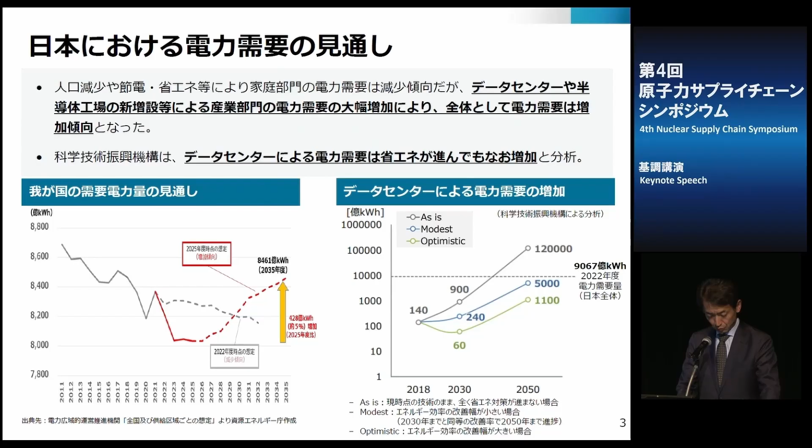This looks at the electricity demand outlook, and it's probably common across the world: data centers and semiconductors will drive the increase in demand for electricity. Against that backdrop, there is a rising need for stable and decarbonized electricity, which will have a great impact on Japanese industrial competitiveness.

That is the backdrop against which we came up with the 7th Strategic Energy Plan. Various countries are moving to leverage nuclear energy. Particularly last year, there were a number of developments in Sweden, Belgium, or Switzerland. Those countries have decided to proactively increase nuclear energy, and some of them have really changed their policies.

Canada has approved the construction of the first SMR. In Asia, countries such as Indonesia, Philippines, and Malaysia are looking more seriously at the possibility of using nuclear energy as an option. International financial institutions are also making the move: World Bank, ADB, Asian Development Bank are lifting their previous bans on funding nuclear energy programs.

IEA has published its World Energy Outlook 2025, which provides the future outlook of the energy system. They talk about the shift in the center of gravity, renewable energy becoming more important, etc., and it also talks about the nuclear energy comeback.

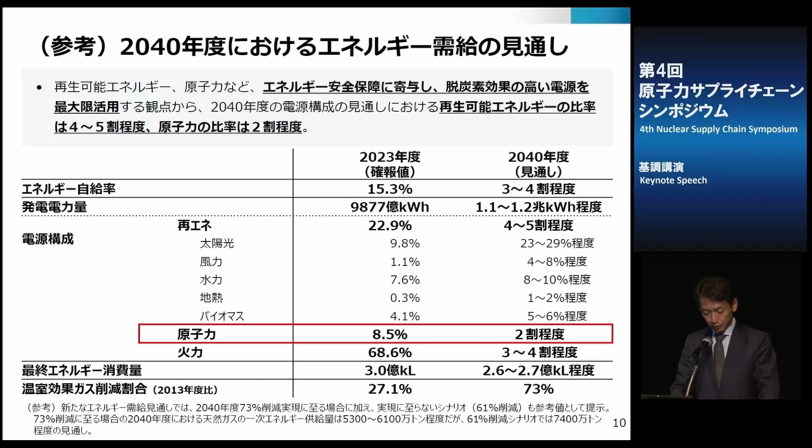This shows the energy supply demand outlook. In FY 2023, 8.5% of the energy demand was met by nuclear. Looking ahead, obviously it depends on how others will grow, but we expect nuclear to be responsible for about 20%.

Now this looks at how the current nuclear power stations are doing. Kashiwazaki Kariwa has successfully restarted. So there are 15 units that have successfully restarted, but some still have installation license changes approved, while some are still under review, and many have yet to even file for that.

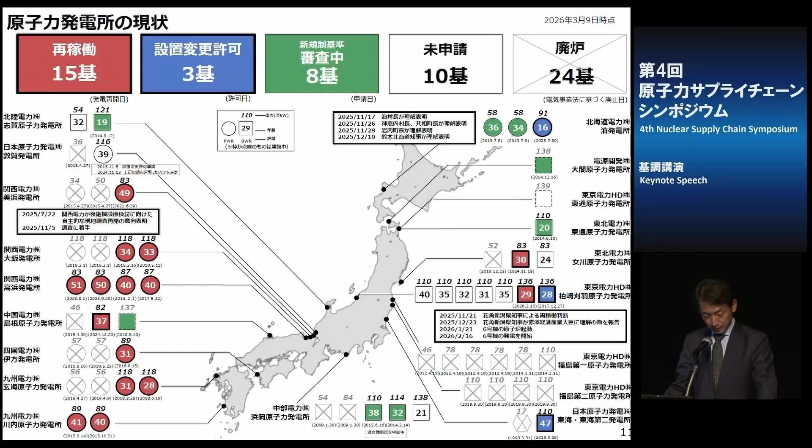But if you look at the outlook of nuclear power and supply capacity, to realize 20% in 2040, we will need to work on capacity utilization improvement and addition of next generation innovation. So it's not just restarts that we can work on. There are other things we need to do.

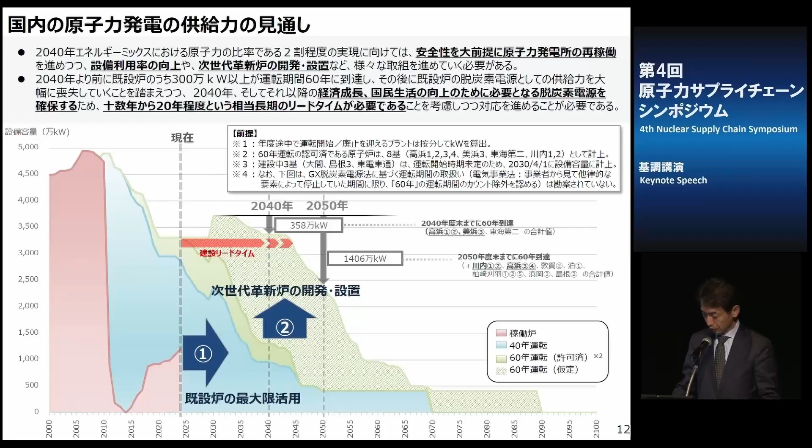Given that there's a long lead time, over 10 years or 20 years, to build those new nuclear power stations or units, this is really something we need to act on now. So we'll need to look at restarts, long-term operation, and enhanced capacity factors. Those would be the focus.

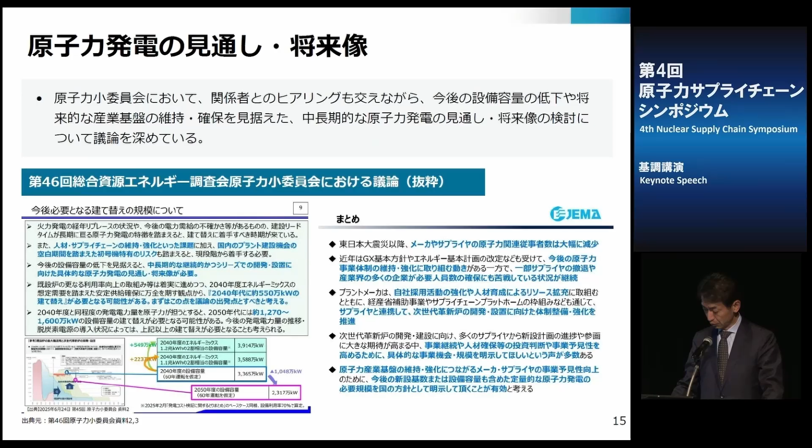With regards to the future for nuclear energy, we have a subcommittee of the Advisory Committee for Natural Resources and Energy for the agency, and we are discussing all this. Obviously industry members and members from academia and local governments are also focused and engaged in this. This will be a very important discussion on installed capacity, etc. There are some uncertainties, but we are looking at what the right picture should be in the future that we will seek to realize.

One of the things that government should do is make sure there's the right business environment, particularly with regard to financing. There are risks that private sector financial institutions cannot necessarily shoulder, so public measures such as government credit enhancement are being considered. And if legislation is necessary, we will work on that as well.

With regard to supply chain enhancement, I may sound repetitive, but if you think about the long term, you need to make sure there's the right supply chain and human resources pool. In March 2023, we established the NSCP, Nuclear Supply Chain Platform, to look at nuclear human resources development and parts obsolescence, addressing that issue, and also trying to support Japanese suppliers being part of international projects. There are a large number of companies and entities that joined. I'm sure many of you here are members of this platform.

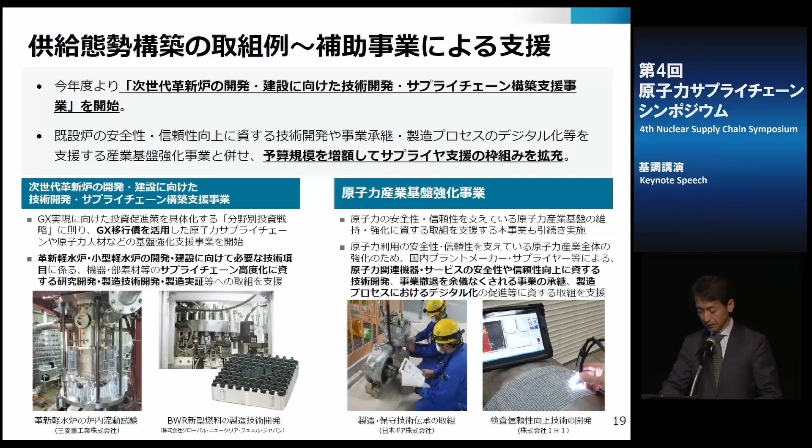I'd like to thank you for your efforts, and METI is also committed to supporting these efforts. Specifically, for suppliers, we would like to support your technology development, and we are also looking at your infrastructure. So we are actually increasing the budget, using the so-called GX bonds, or climate transition bonds, to fund those activities.

We are also focusing on commercial grade dedication and 3D printers, as well as utilization of AI, so as to leverage all those new technologies, and we want that to be an industry-wide initiative. We are supporting that as the government, supporting each and every entity with some projects, but also trying to support a wider, broader, common initiative.

When you think about the supply chain, human resources is a very important part. If you look at the whole of Japan, and the manufacturing industry as a whole in Japan, we are facing a serious shortage. Against that backdrop, how do you make sure there are enough people to be in the field and in the plants? So we are working on engaging students as well as mid-career people.

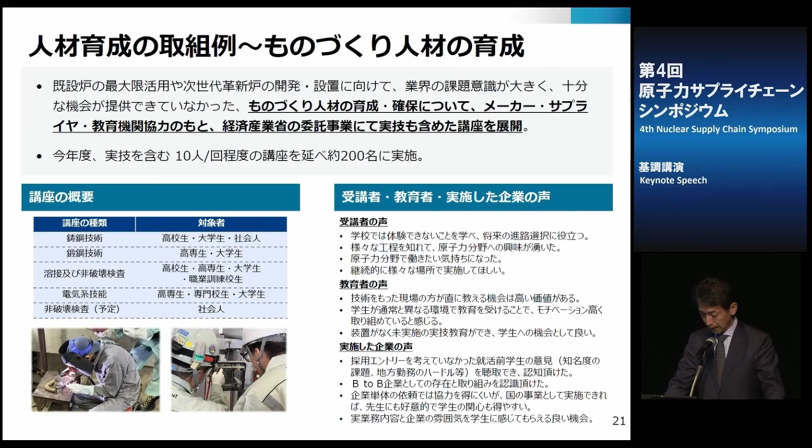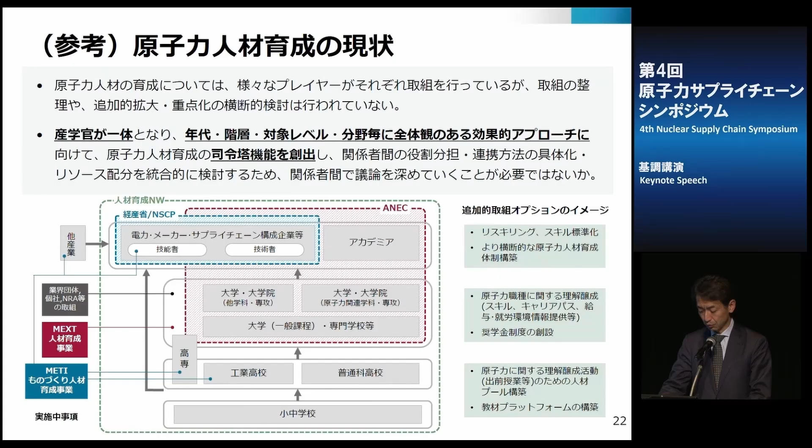We are getting the support of some supplier companies to offer courses to potential new nuclear workers. It's not just METI; we are also working with MEXT, NRA, and all those related agencies. We're also working with JAIF, an industry organization. But sometimes there could be overlaps, or spots in between that we are missing out on, so we are trying to coordinate across those different efforts. Given that we need to really make sure there's the right human resources pool in Japan, we would like to do this effort more effectively and efficiently, and therefore coordination is all the more important.

Given that understanding, METI actually took the lead to organize this new consortium, the Council for Nuclear Human Resource Development and Enhancement. This is intended to become a footprint to establish a command center to coordinate various activities at various agencies and organizations, and given that there's a wave of nuclear building in the global industry, we are trying to make sure that the Japanese industry can leverage that opportunity.

So the Japanese suppliers, so that they can be part of the construction abroad, we are actually helping. For example, we sent a mission or a group of suppliers to appeal the track record and the strength that the Japanese suppliers have. We are also organizing study sessions for the international and overseas standards and codes that those suppliers need to address, so that Japanese suppliers can contribute to energy security outside of Japan as well, and also get the right opportunities so that they can maintain their technology base and human resources base.

Given the global situation that we are in, we will really need to think about the maximal use of nuclear energy in Japan. For that to be sustainable, we will need to make sure that the supply chain is there, and we would really need the industry support and cooperation to make this happen. In addition, for the next generation innovative reactors, we will need to make sure that there is the right parts and components material supply system, and actually enhance that in conjunction with human resources. So we would continue to work on these so as to proceed with the policies of the government as a ministry, and we hope we can continue to have the support of the Japanese industry.

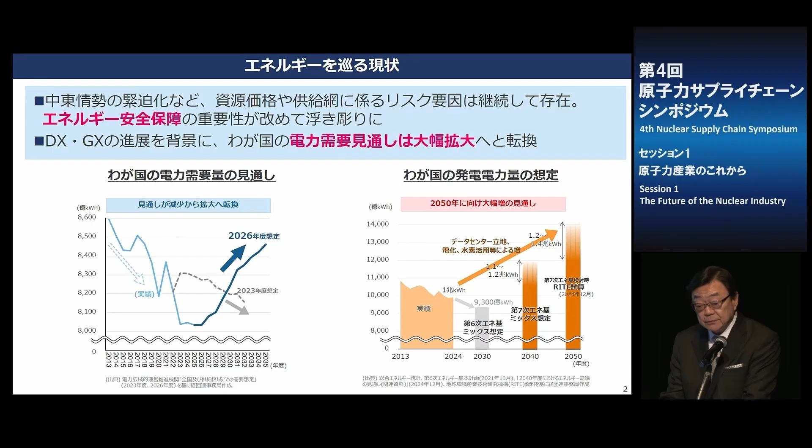In Japan, drive for electrification through green transformation and the advancement of digital transformation fueled by generative artificial intelligence have radically shifted the electricity demand outlook from a declining trend to a significant expansion. Achieving carbon neutrality by 2050 while adhering to the S+3E principle, that is, achieving both decarbonization and an affordable and stable electricity supply, has become an increasingly important policy issue for Japan in maintaining and strengthening industrial competitiveness and achieving sustainable growth.

One key to resolving this is the use of nuclear. Keidanren has long urged the government to actively utilize nuclear as a quasi-domestic, stable, and decarbonized power source. As I mentioned earlier, the 7th Basic Energy Plan approved by the Cabinet in February of last year clearly commits to making maximum use of nuclear, and the business community highly appreciates it.

Furthermore, we are extremely encouraged by the proactive stance of the new Takaichi administration to promote nuclear policy, including consideration of cutting-edge technologies such as fusion energy. We urge the government to continue to implement concrete measures to effectively utilize nuclear power. In doing so, it is important that the quantitative outlook and vision be provided so that operators can have predictability when making medium to long-term investment decisions.

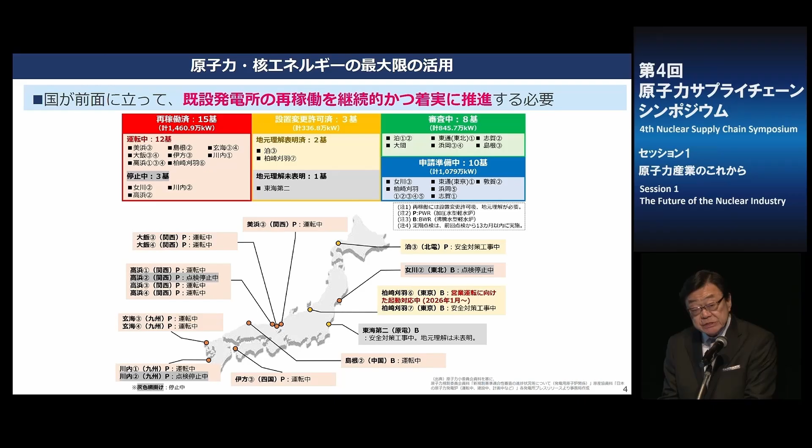To facilitate the restart of existing plants, Keidanren has been making policy recommendations and taking various other measures, including fostering understanding among stakeholders and checking the status on site.

For example, on December 1st of last year, our chairman and vice chairman visited Kashiwazaki Kariwa plant, which supplies power from the coast of the Sea of Japan to the Tokyo metropolitan area and plays a significant role. He observed safety measures of Unit 6, both hardware and administrative aspects, such as emergency response programs.

And they confirmed that the entire plant, including the partner companies, is working to secure safety in multiple layers. After the visit, the chairman and the leadership met with the Niigata governor, Governor Hanazumi, in his office, and conveyed the chairman's respect for the governor's decision on the restart and his gratitude to the people of Niigata, and told him that Keidanren will consider measures to contribute to the development of Niigata Prefecture.

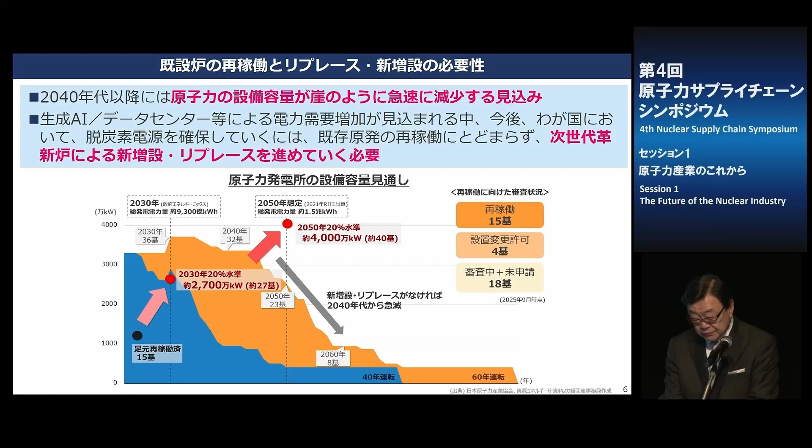Given the expected increase in electricity demand due to artificial intelligence and data centers, securing a carbon-free power source requires not only the restart of existing plants, but also the replacement and new builds of next-generation advanced reactors.

For replacement and new builds, it's important that the public and private sectors share a roadmap on next-generation advanced reactors so as to promote the use of advanced LWRs, and also advance the development of fast reactors and high-temperature gas-cooled reactors in parallel.

Fast reactors are essential for Japan's nuclear fuel cycle. We hope to see efforts being accelerated to establish this technology.

HTGR, high-temperature gas reactors, offers a wide range of applications, including heat supply and hydrogen production. Business community has a great expectation in this technology as a promising source of hydrogen, such as in hydrogen reduction steel making.

These new reactor types have characteristics and safety features different from conventional LWRs. It's important that they be reflected in designing regulations.

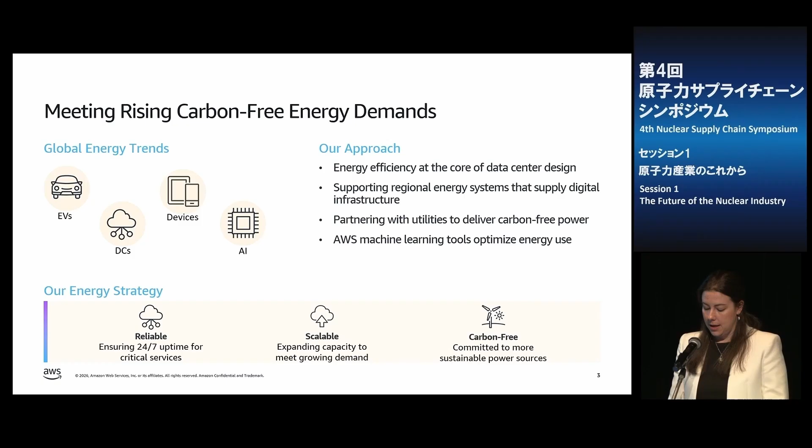Renewables and nuclear are not competing priorities. They are complementary pillars of a credible decarbonization strategy. Nuclear energy generates nearly 20% of US electricity and nearly 55% of the United States emission-free power. It's carbon-free, scalable, safe, and critically provides reliable baseload power 24 hours a day, 7 days a week, regardless of weather. For Amazon, nuclear therefore represents a response to a fundamental challenge.

As our digital infrastructure continues to grow to support AI and cloud services, we need energy that is always on. Renewables are essential, but they are weather dependent. Nuclear fills that gap. That is why Amazon has entered into nuclear energy agreements, including with both existing nuclear facilities,

such as Susquehanna in Pennsylvania, and next-generation small modular reactor developers. We are supporting SMR innovation through strategic agreements and capital investments, partnering with utilities and operators to procure carbon-free energy, and diversifying our carbon-free energy portfolio with nuclear as one component of a broader strategy.

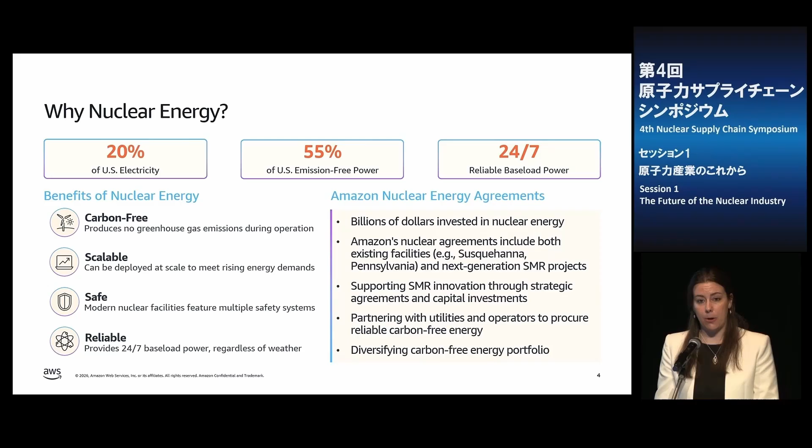Nuclear's energy potential is clear, but scaling it requires a resilient supply chain, and that supply chain needs long-term demand signals to develop. As you all know, nuclear is not a single product, it is a system. Deployment requires synchronized execution across engineering, manufacturing, construction, fuel supply, operations, and quality assurance. Any delay in a single component creates critical path failures across the entire project.

3 constraints define the challenge globally. First, nuclear is a system; every domain must execute in coordination. Second, workforce and quality: skilled labor, nuclear-grade quality control and quality assurance, and rigorous documentation are global constraints today. Personnel deficits drive cost inflation and schedule risks.

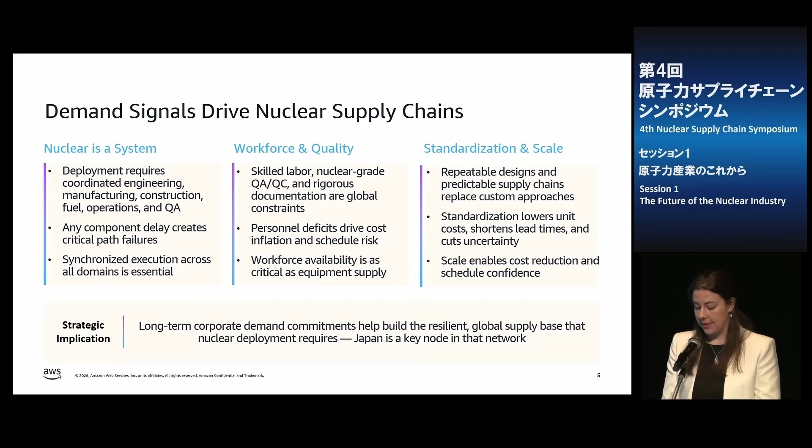Third is standardization and scale. Repeatable designs and predictable supply chains replace custom approaches. That's because standardization lowers unit costs, shortens lead time, and reduces uncertainty. The strategic implication is this: long-term corporate demand commitments help build the resilient global supply base that nuclear deployment requires, and Japan is a key node in that network.

That brings us to Japan and why Japan matters. 3 principles define what enables resilient nuclear supply chains. The first is demand visibility enables investment: long-term demand signals unlock supplier capacity. Bankable offtake commitments enable manufacturers to build out production lines with confidence.

Second, early engagement improves outcomes. Design for manufacturer, qualification planning, and realistic lead times ultimately reduce execution risk, and supplier collaboration prevents late-stage bottlenecks. Third, and most relevant for this audience, Japan's strengths scale globally. Japan's precision manufacturing, quality culture, and heavy industry capabilities are not just assets for Japan's domestic nuclear restart program, they are critical enablers of global nuclear deployment.

Our own experience illustrates this directly. In November 2025, X-Energy, our SMR development partner, signed a $40 million graphite supply agreement with Toyo Tanso for high-grade IG-110 isotropic graphite for the Xe-100 reactor cores. This graphite acts as a critical neutron moderator and structural component. This partnership is a signal of what is possible when Japan's world-class manufacturing meets the global nuclear build-out.

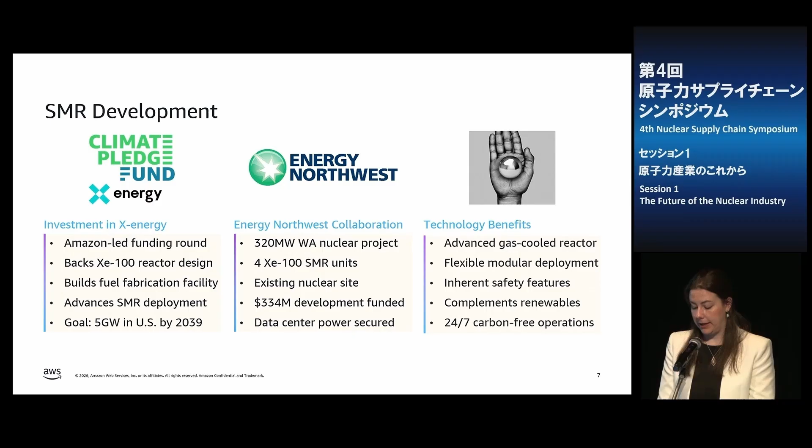The XE100 complements our renewable energy portfolio: advanced gas-cooled design, flexible modular deployment, inherent safety features, and 24/7 carbon-free operations. Drawing on our experience across these operations and agreements, 4 lessons stand out for anyone looking to scale renewable energy, nuclear energy. The first is flexibility and creativity.

First of its kind nuclear developments require commercial solutions that do not yet exist. Investing in and adapting those solutions is how the industry will move forward.

The second lesson learned is the need for collaborative models. Tailored partnerships with experienced nuclear operators are critical. Amazon does not own or operate nuclear facilities. We partner with those who do. One-size-fits-all approaches are not going to work in nuclear.

The third is grid integration. Our goal is to support regional energy systems that supply digital infrastructure and broader grid demand, not to optimize for a single customer's needs, but to add new carbon-free capacity to the grids that all of our communities depend on.

And the fourth is the need for long-term agreements. Reducing nuclear development risk requires long-term contracts and strategic financing. Certainty of demand is what unlocks investment in supply chains, in workforce, and manufacturing capacity.

These are not just lessons from US projects, they are a framework for how corporate energy demand can support Japan's nuclear goals, providing the long-term demand signals that justify supply chain investment, workforce development, and capacity expansion.

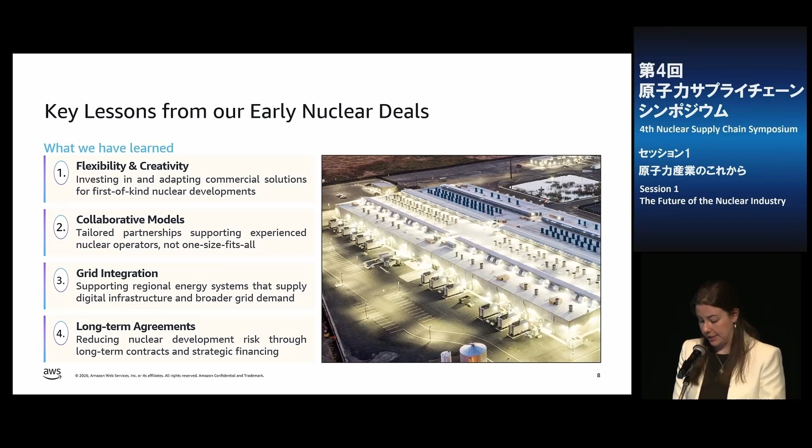Thank you very much. Amazon is genuinely committed to Japan's energy transition, and we look forward to continued dialogue with METI, the Japan Nuclear Industry Association, and the broader supply chain community represented in this room today. Thank you very much.

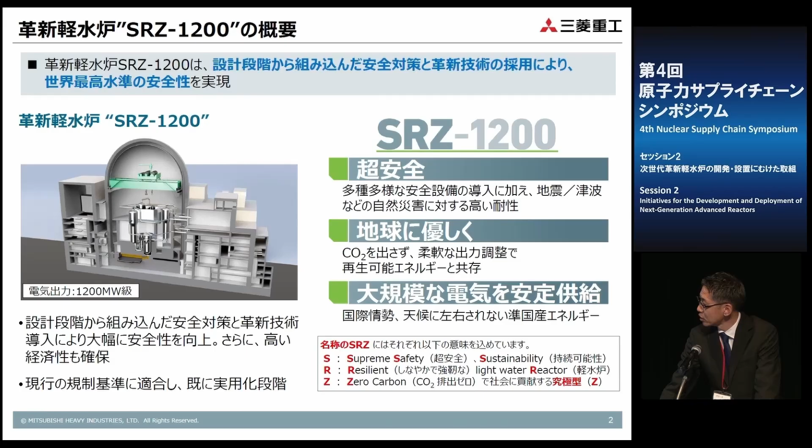So where are we with regard to the development? For the SRZ 1200, we are working in tandem with 4 utilities that own and operate PWRs. We are working on the standard plant development, and the basic design for that is almost finished. We are also conducting various demonstration tests that will be fed into the licensing process, and things are going as planned so far.

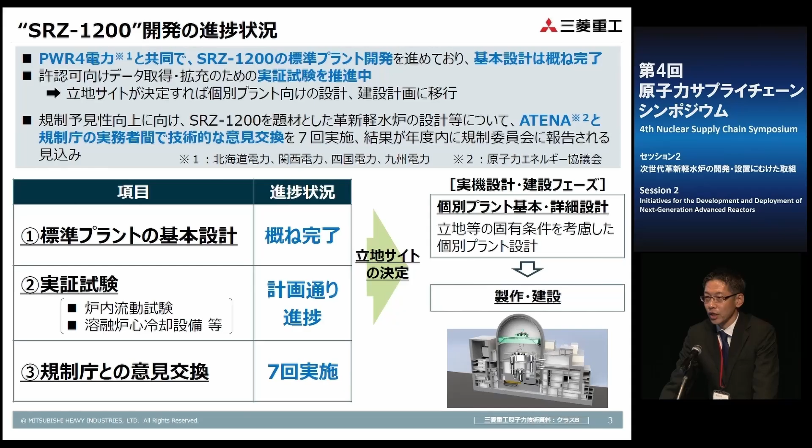We would like to improve the regulatory foreseeability, so we are working with the NRA at the working level. We've already held 7 such sessions, and the results will be reported at the Nuclear Regulation Agency's commissioners meeting by the end of this financial year. So we are now ready to actually move into the detailed design for each and every siting.

This is about the standard plant and the basic design. We have established the basic common specifications. We've designed the major components, the systems, and the layout. Those are all almost complete.

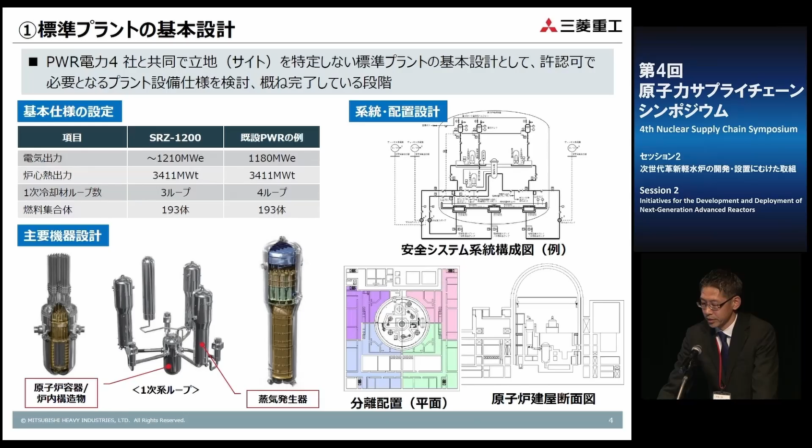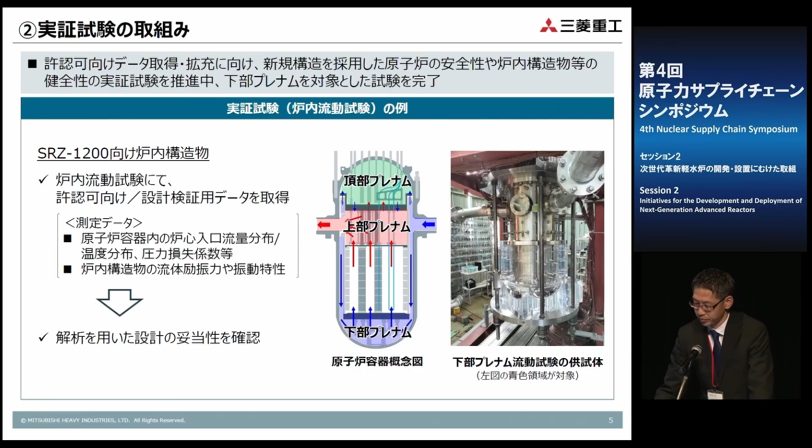With regard to communication with the regulator that I referred to earlier, these are obviously using a different design from the existing light water reactors, so some parts may not have enough regulatory foreseeability. We have identified 3 potential issues, and we, as the licensees, have been presenting them to seek the view of the regulators. We've been doing this for about a year, and by the end of this financial year, those results will be reported to the commissioners' meeting, as I mentioned earlier.

Now, this is about our small light water reactor that we are also developing. Given that there will be various and different needs for power generation, we are proceeding with the conceptual design using Japanese technology for a small light water reactor.

Given that it is a small reactor, we are using passive safety systems, and we are trying to make it so that the seawater system is no longer necessary as a safety system, allowing for more freedom of siting. We will obviously address the seismic requirements and severe accident requirements that are required in Japan.

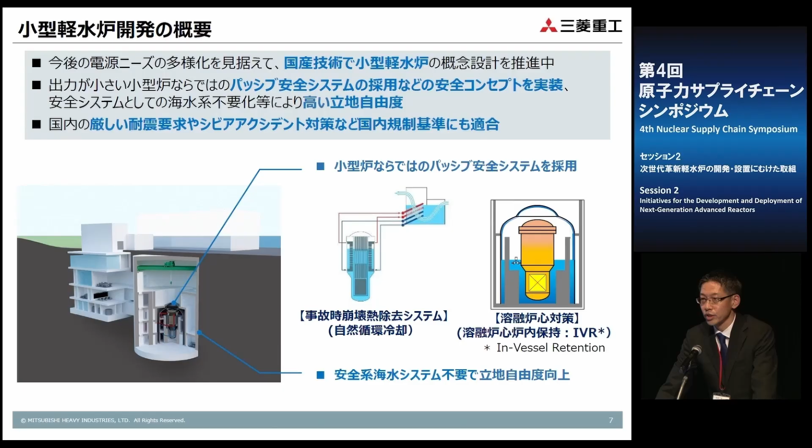Now, this is about building up the company's capacity to realize all that. Given that the government intends to maximally use nuclear energy, we are also building up our organization and resources. In FY2025, including the group and affiliated companies, we have hired 200 new people for nuclear related operations, and we will continue this in the next financial year as well.

With regard to the training system we have in the company for construction, design, and maintenance, we have fundamental courses, about 50 of them, covering all those different fields. For field skills, we are using simulators and virtual reality. We have various materials and modules ready. We also have programs for skills training, so we continue trying to offer opportunities for learning and training for our human resources pool.

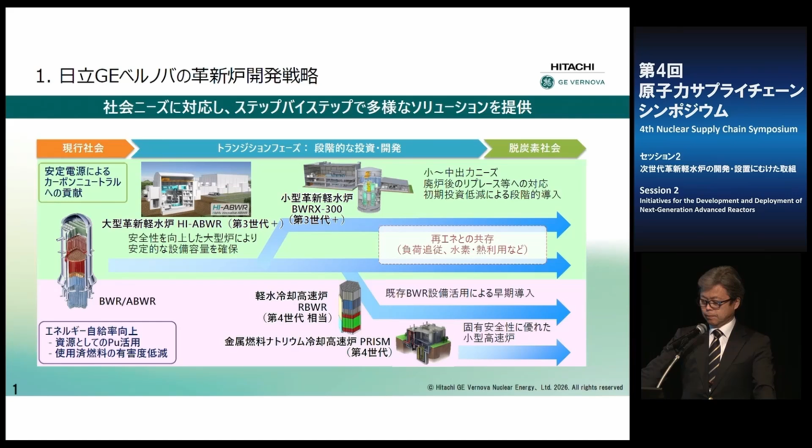In terms of working together with renewable energy, we are using the technology for load following and hydrogen production, as well as heat production. This is the larger one, HI-ABWR, which is based on ABWR.

Lessons learned from Fukushima are being incorporated from the design phase so as to satisfy all the regulatory requirements in UK and Europe, and there are various safety features. One is the walk-away safe concept.

As you can see on the right-hand side, at the time of an accident, without manual operation, the system could be run for 24 hours. And in terms of controlling radioactive material release, we use the noble gas membrane.

Cesium is removed through the filtered vents, but also by removing the noble gas, the radiation level could be reduced to 1/100th, which would alleviate the need for resident evacuation. We're also enhancing the resistance to terrorist attacks and hazards.

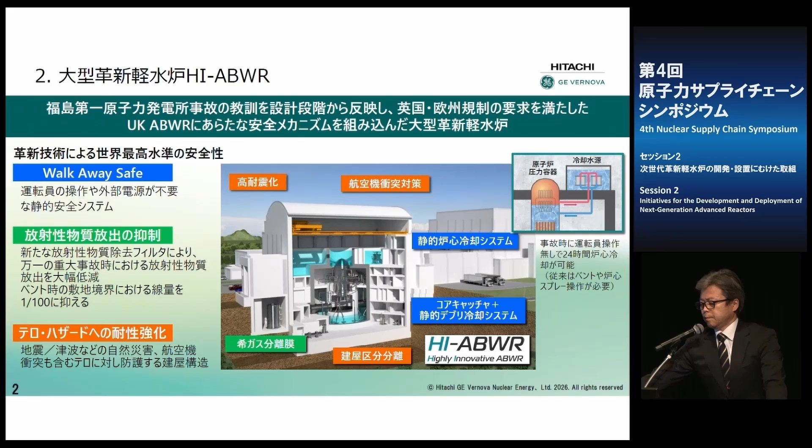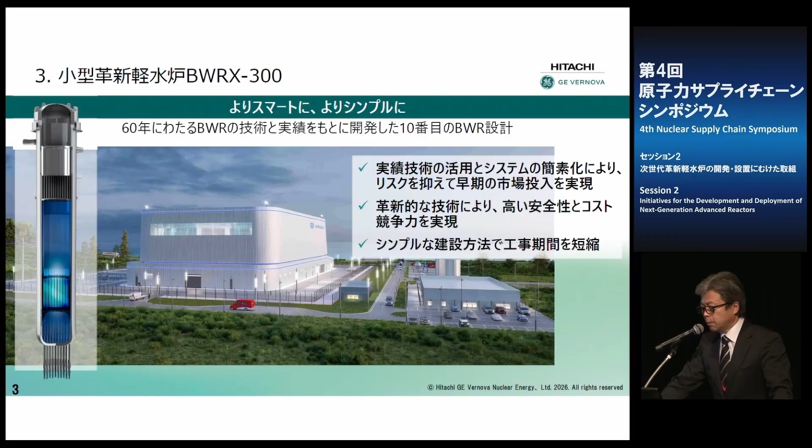From here, I'd like to talk about the small reactor, BWRX-300, for smarter, simpler solutions. Accumulating all of the expertise we have acquired over the last 60 years of BWR, the 300,000 class is the output. As for characteristics: the world's best safety is to be maintained, yet it excels in economy, constructability, and flexibility.

You can see the reactor building at the center, and what's shown in blue is the pressure vessel, which supports natural recirculation. This is almost buried, and therefore it can resist attacks from outside, including aircraft crashes.

And we have the integrated isolation valve, so by just shutting down the valves, we can maintain coolability. Natural circulation is used for cooling, and for 7 days cooling could be maintained without operator involvement.

By introducing these innovative technologies, we can reduce the amount of work necessary as well as materials. We have accumulated our expertise in modular building construction, and we are trying to apply this more broadly for assured and short-term construction.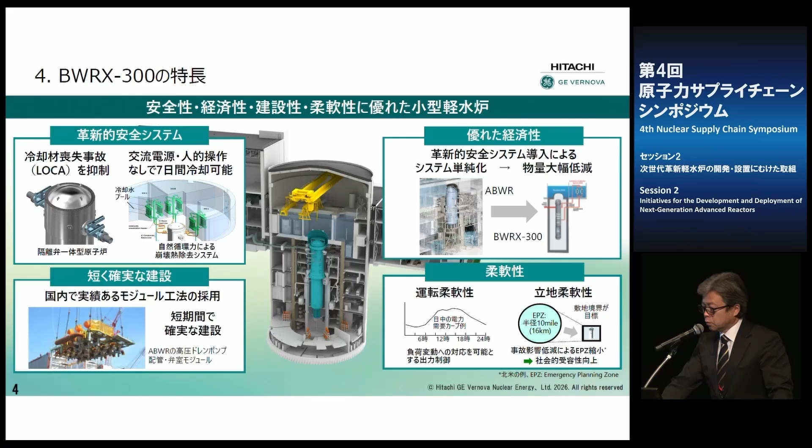In terms of flexibility, it will have a load-following feature and an EPZ, Emergency Planning Zone. The planned zone for evacuation would be limited to within the premises so as to minimize the impact to local residents, and we're trying to enhance acceptability by that.

As the first country in the West to decide on adoption, Canada raised its hand. This is in the state of Ontario at the Darlington site. 2030 is the scheduled date of the start of operation, and altogether we're thinking of building 4 units. This is the site as it looks today. I'm going to skip it in the interest of time.

So the projects proceeding globally: on the upper left is the Canada Darlington site, on the right-hand side. In Saskatchewan, 4 more are to be built. And in the U.S., TVA is to build the site at Clinch River. The application has been submitted to have the construction permit screening start. And in Poland, there are plans to build 10 units altogether.

And there is a project going in the UK as well, where GE Vernova Hitachi and owners are signing contracts to proceed. Hitachi GE Vernova is participating as the co-developer.

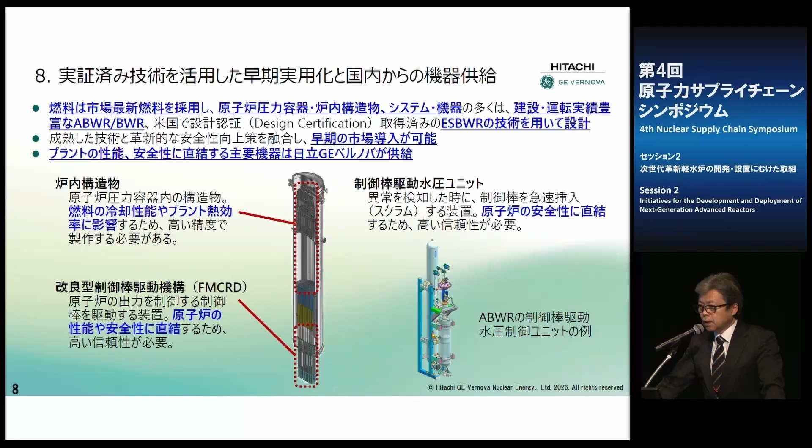And the key is that these components are to be supplied from Japan—that's the key characteristic of our approach. As for global deployment and main equipment supply, we are collaborating, planning to work with approximately 70 companies in the Japanese supply chain.

We want to create business opportunities together with these Japanese partners so as to improve profitability as well as enhance technology and human resources. By collaborating with them for supply, we can ensure the success of the initial unit as well as translate that into mass production of the ensuing units.

With regards to technology transfer and human resources development, we are seeing the number of veteran experienced workers declining. So we want to increase experienced workers by 50% by 2030 compared to today, and we are taking various approaches addressing different aspects. That concludes my presentation. Thank you for your attention.

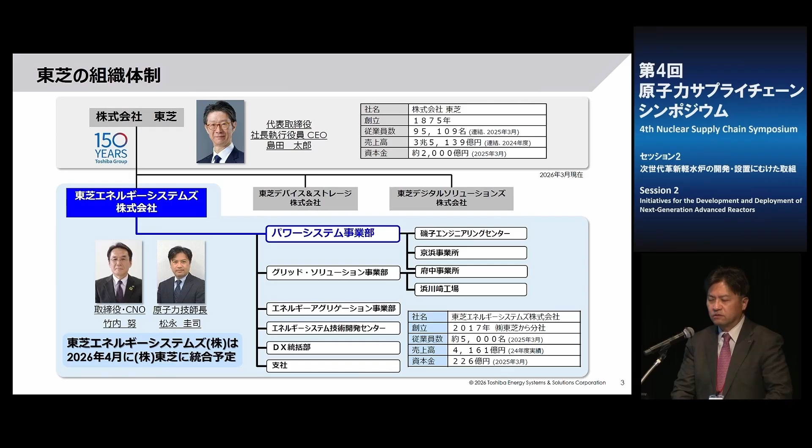Let me first go through our structure and organization. Underneath Toshiba, we have an operating business called Toshiba Energy Systems, which was spun off. But this coming April, Toshiba Energy Systems is going to be integrated back into Toshiba, so we will be working as one operating department under Toshiba beyond April. Also, our Power System Division had nuclear power, thermal power, and hydropower, but now we will be formed as a nuclear business department division from April onward, so we focus on nuclear within our division.

Next, let me talk about our efforts in nuclear power, starting from the front end on the left all the way through plant construction, restarting, decommissioning, or on the back end for processing and reprocessing. We cover a wide range of different nuclear business using different nuclear energies, and we are also trying to contribute to new technologies as well.

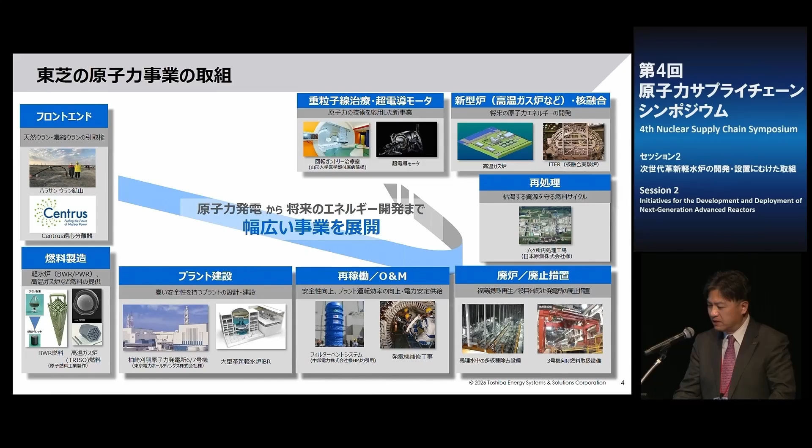Since the accident, there's been some changes in regulation in Japan and around the world. In Japan, new regulation is introduced to address severe accidents and terrorism. Around the world, they're talking about the period without operators being shortened, and also the target area for emergency planning being minimized as much as possible.

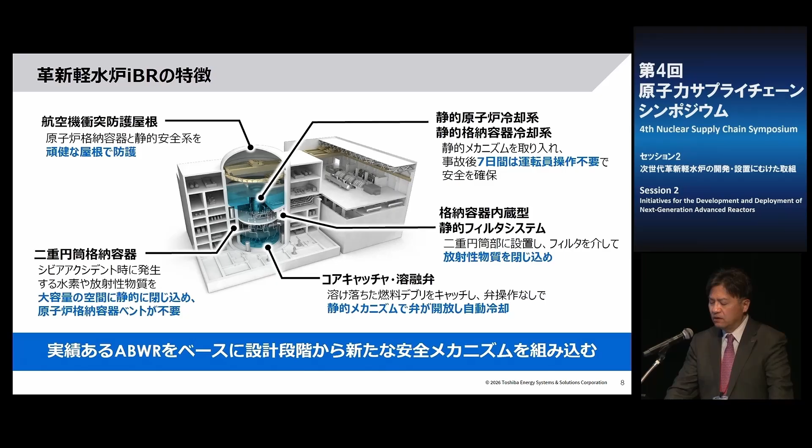This is the equipment to accomplish those points I mentioned earlier, and these are the main features. Left top, this is about the aircraft impact protection roof - even with an aircraft impact, we can protect the safety equipment. To the right, a static reactor cooling system, static containment cooling system - I will have more details on this in the next slide. Going down, core catcher and melt-through valve. Also to the left, double-walled cylindrical containment vessels, and we also have a static filter system for the containment vessel. Those equipment are utilized to accomplish the 3 safety-related elements I mentioned.

This is the safety system activation mechanism for IBR. So for some reason, core temperature increases because of cooling suspension. Then, as you see at the right top, the static reactor cooling system is what we use to remove the heat - the orange line shows hot steam being released to the upper pool to be cooled down, and using the blue line to put the water back into the reactor so that we can continue cooling down the reactor.

Then we should be able to contain any accidents to some level. But even if we face a meltdown in the core, at the right bottom and left bottom we have a core catcher, so we can receive the melted core, and once we receive it at the bottom, we can also circulate water from the bottom side, so we can continue cooling.

Then we continue cooling, and the water will actually evaporate along with the hot heat. To remove the heat, we use the left top, which is the static containment cooling system. That's what we have. Just like earlier, same mechanism: the orange line takes the hot steam to the top and cools it down there. Once it cools down, we put it back into the suppression pool at the bottom.

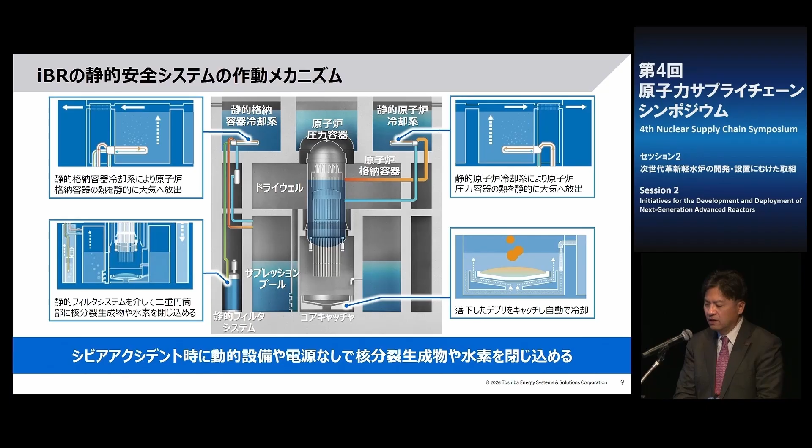At the same time, radioactive substances and some gases will be created. We use this green line to go down to the static filter system - it's a filter vent. We remove the radioactive substances, including hydrogen, and contain them into the double cylindrical containment system, making sure they will not be released outside. Next, talking about the robustness of the building.

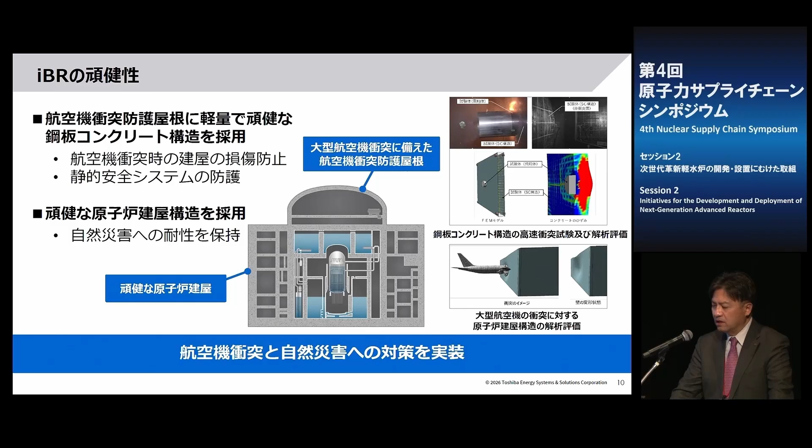Then, safety category - ABWR already applies this safety category, and we are reinforcing these categories furthermore. On ABWR we have 3 safety categories. In addition to these 3 categories, we are also adding the countermeasure for severe accident, the SA equipment, severe accident equipment. So we have a very tight categorization applied. With SA equipment along with DB equipment, we will have both static and dynamic safety systems, so we can ensure diversity as well.

We will also have a high load following capability as ABWR, coordinating and coexisting with renewable energy. On ABWR there is a flow control using the recirculation pump, and we will basically apply the same concept into this plant.

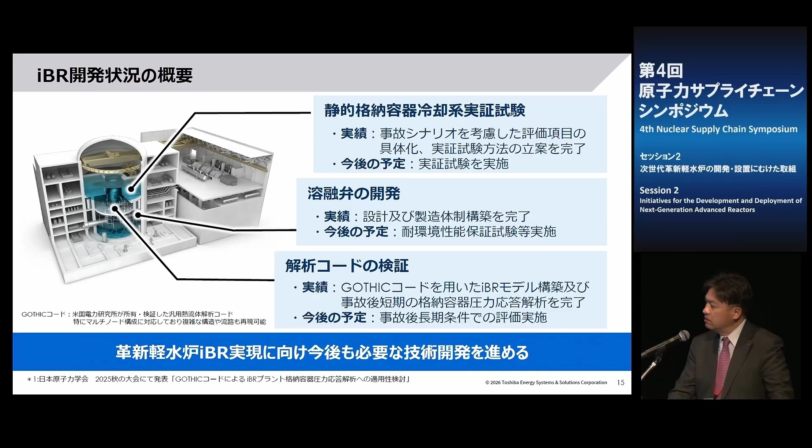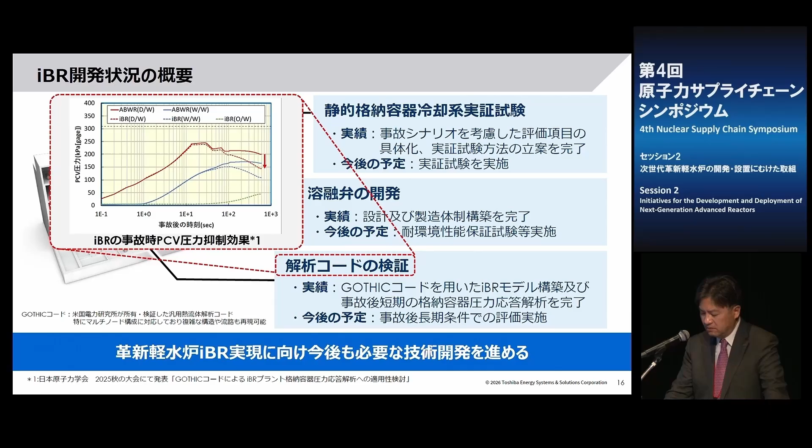Compared to ABWR, with IBR after the accident the pressure is actually minimized compared to ABWR. That was confirmed. This is the activities taking place at the Atomic Energy Society of Japan, AESJ.

AESJ has already put together the needed technical requirements, and they are being reviewed right now for the next reactor. For 2024, they went through discussions for about a year. At the end of last year, they put together a summary to come up with a report, shown at the bottom right, that was already issued.

So with the accident at 1F Fukushima, based on what happened on BWR, there are actions to consider for BWR specific design, and that is incorporated in the next generation version. The concept for the next BWR also meets the requirements put together through phase 2, and they confirmed no new additional issues, which was put together in the report. We also want to utilize this information into our reactor.

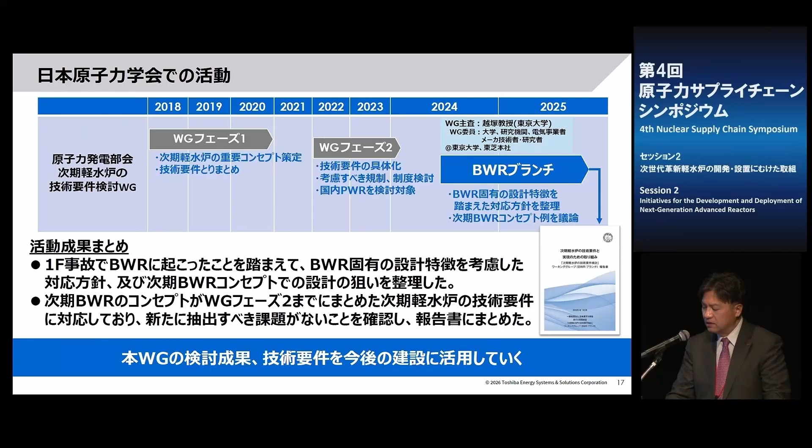Let me also touch on human resource development and supply chain maintenance. This is our program to develop human resources. To the left, in the middle, where it says technological training, that consists of 4 major pillars shown on the right-hand side in orange: safety training as the basis, nuclear engineer education, monozukuri (manufacturing education), and global education.

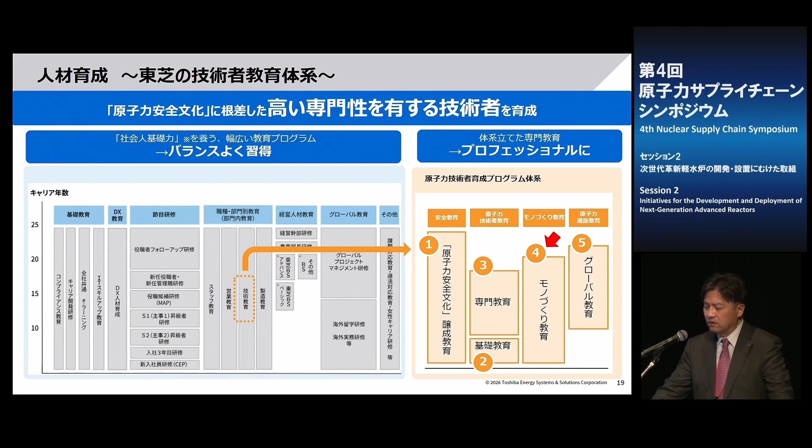Especially for manufacturing-related education, even during reactor shutdown, we have been conducting training on the field. Simulation, site training, and hands-on training were all combined together to be offered.

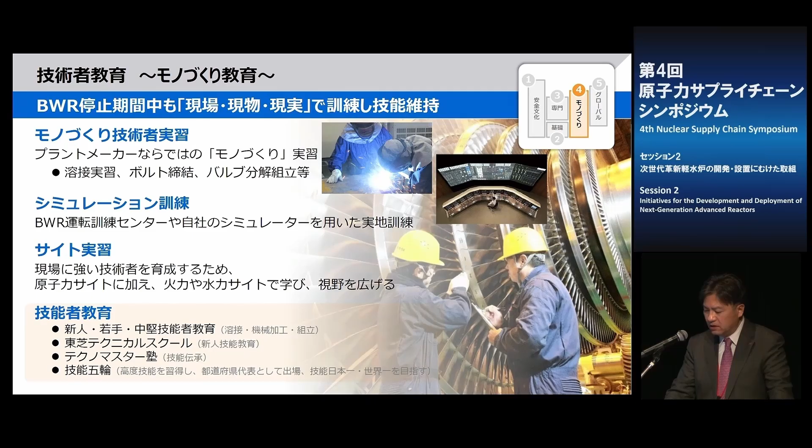As the engineer training, we are focused on also younger people and new members, so as to give them the basic training and the specialized education.

And supply chain situation: we have identified issues in supply chain, as mentioned also by the previous presenters. As counter actions, we want to create more opportunities for training using subsidies, and propose more highly dependable maintenance plans, and also outreach activities. I think this is also another important opportunity to have better understanding by the suppliers.

But still, there is a risk of withdrawal of suppliers, in cases where a supplier decides to withdraw. So we need to find alternative suppliers, and we can further use general purpose, industrial products available in the market as much as possible.

This is one example on the left: this is something where we work with a material supplier to come up with a new core material, which we are working on. In the middle is using a 3D printer, a new manufacturing technology we are trying to establish. The right-hand side is outreach activity, where we participate in international conferences and exhibitions.

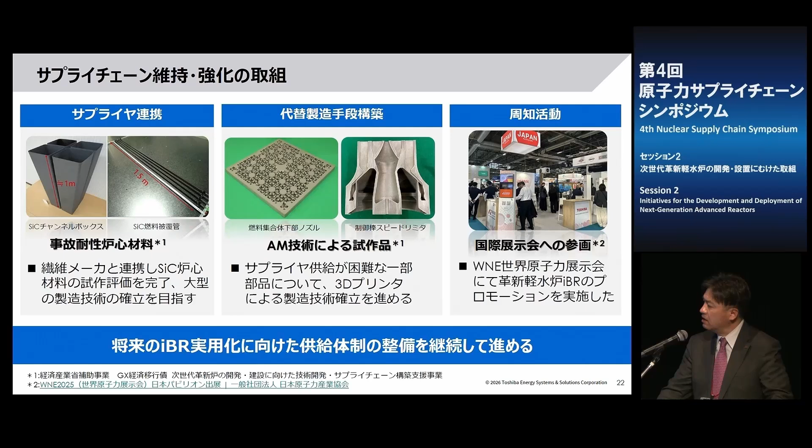In summary, through these efforts, we take the lessons from the Fukushima accident and try to build an innovative IBR to meet all the requirements set globally. We hope to accomplish this as early as possible. This concludes my explanation. Thank you.

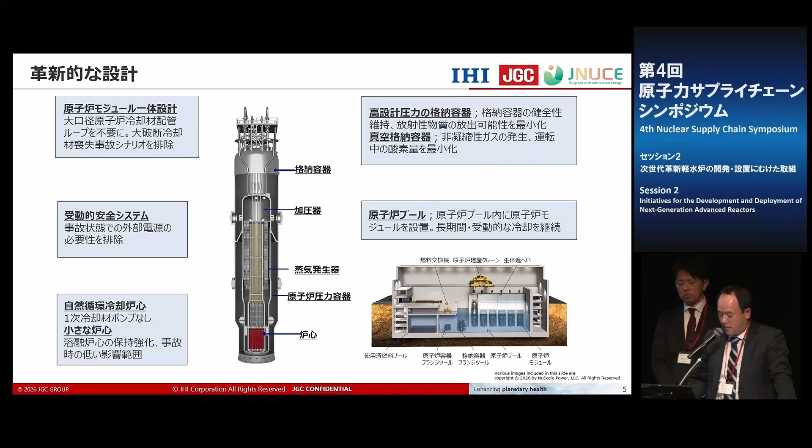This is Yanagisawa from JGC. I'd like to talk about the energy policies in Japan and the world that provide context for SMR. As we heard earlier from the agency, there are SMR projects in the Western world, but even in Southeast Asia, through the AZEC, the Asia Zero Emission Communities program, there are projects supported by the governments of Japan and the United States to build nuclear in Southeast Asia, and we are part of that. In Japan, as we all know, the 7th Strategic Energy Plan and the GX 2040 vision refer to small reactors, not just light water reactors.

It also talks about Japanese companies being part of international projects, so we are also trying to be part of that.

Specifically with regard to NuScale SMR in Japan, United States, and Europe: TVA is looking for a maximum of 6 gigawatts. In Romania, we've also signed FEED - we completed phase 1 for FEED, and we also have the final decision made for FEED phase 2, and are going to pre-EPC. For Southeast Asia and Africa, there are various support and assistance programs, and we are also active here, particularly working on Indonesia, where we were involved in a feasibility study supported by the United States government, conducted in 2023-2024.

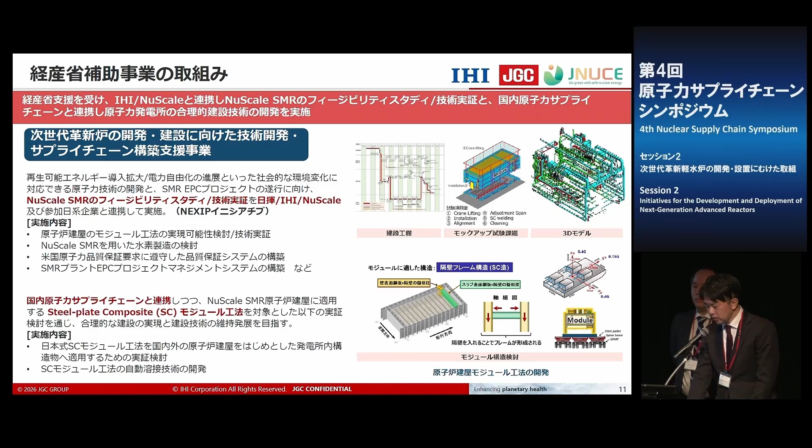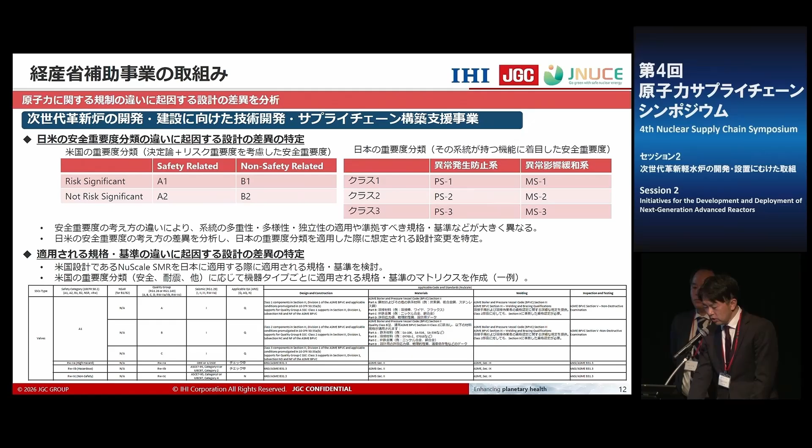We would like to thank the supply chain partners we're working with, and we're also working on the construction method and regulatory framework research. In Japan and the United States, there are established regulatory systems, which is not the case in other Southeast Asian countries. So we are looking at existing regulatory frameworks and what that could mean for the supply chain when we go to other countries.

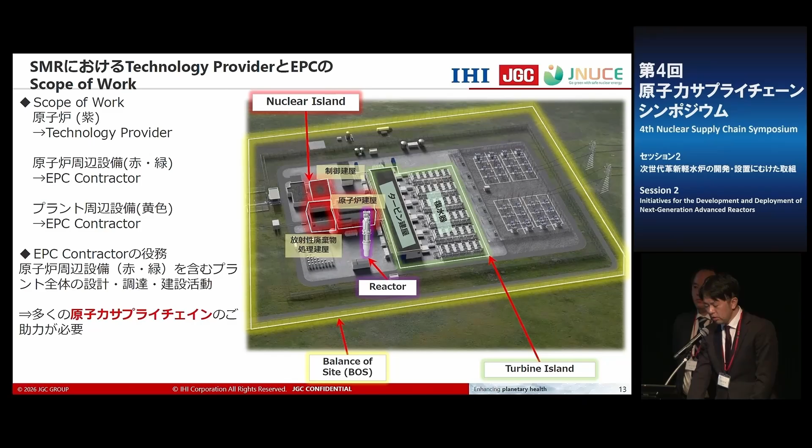So for us, we could actually work as an EPC, and we can be responsible for everything other than the reactor, but that would require cooperation from other suppliers.

We are working on a government-funded project to look at human resources exchange, particularly with the Global South, and looking at how nuclear energy can be introduced in other countries. So we look at various components and where Japanese companies could actually be part.

In the past, for nuclear power station buildings, the safety-related systems had very tough requirements. But for smaller stations, we can apply a graded approach, and not everything is so rigorously required. It's not just regulatory requirements, but we can also utilize commercial grade items.

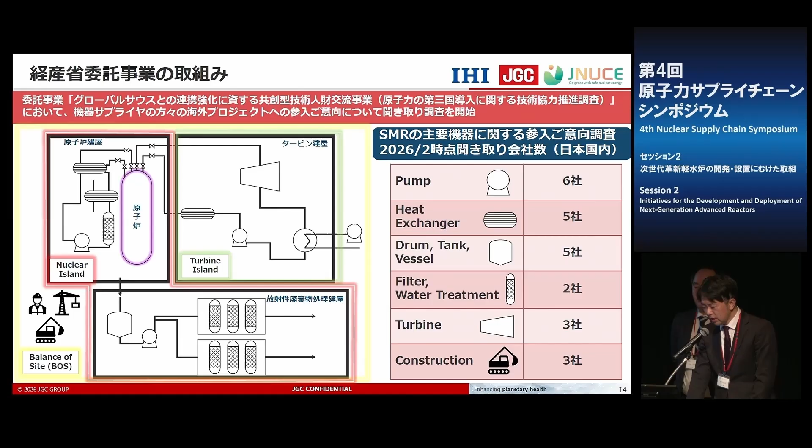Now it's back to IHI. I'd like to talk about what we're doing. In Romania, we have this project called Doicești. We've completed phase 2 of the FEED, and we are trying to realize commissioning in the early 2030s.

We've looked at the containment vessel and the steel module that will form the reactor building, and we are working with local companies, looking at what procurement model would be best, and trying to reflect that into the project planning.

With regard to large components and enhancing seismic performance, in the NuScale module we are using special materials, but we have established the welding technology and are doing final validation, conducting a full-scale mock-up test.

The NuScale SMR is designed as a standard, US-based design, and we are also looking at how we can adapt that to more seismic-prone areas such as Japan and Southeast Asia.

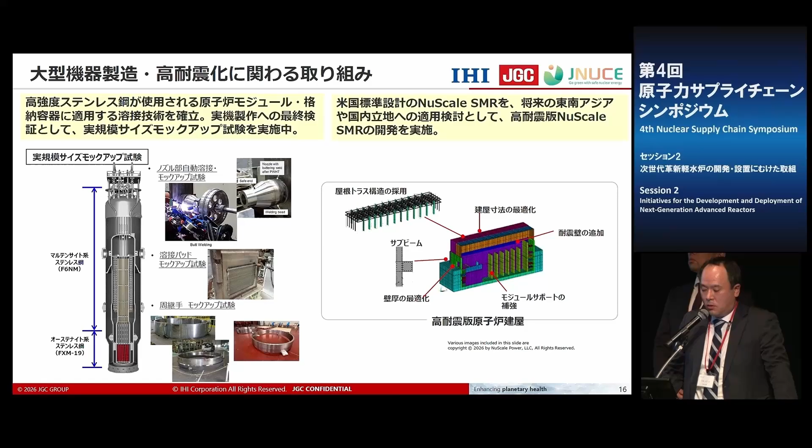For the medium and long term, we would continue to provide major and key components to various sizes of reactors and systems, so necessary CapEx, capacity expansion, and technology development would also be part of our focus.

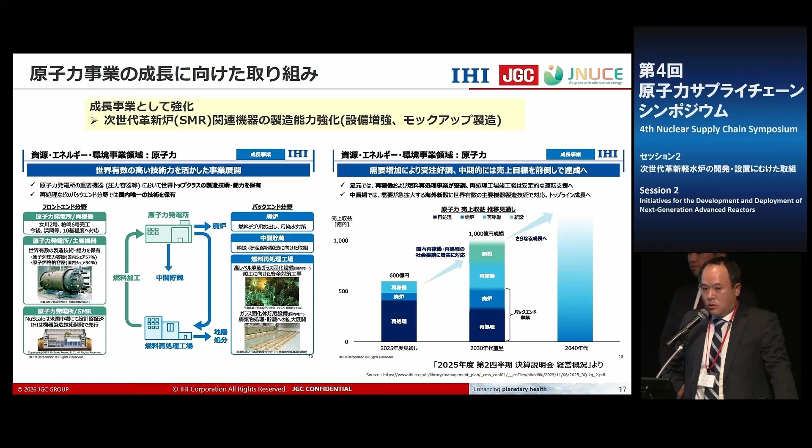With regard to supply chain enhancement and human resources development, for this real-scale project for NuScale SMR, we are trying to supply the right components and services, and we are working with domestic suppliers and building prototypes, etc. We hope that through those opportunities, we support human resources development at the suppliers as well.

We're also trying to help develop the human resources that work in manufacturing, with the necessary expertise and skills. We want to make sure there's the right human resources pool, and we would also focus on training and education, involving nuclear safety and quality, and reducing the risks thereof.

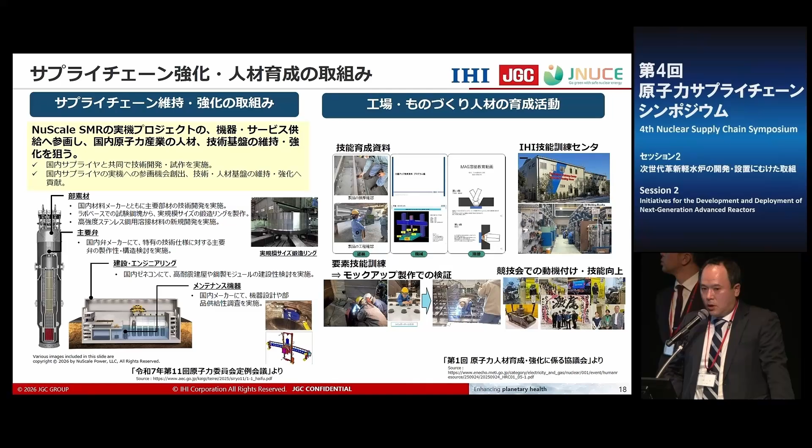Last but not least, currently we are focusing on the projects that are going on in the Western world for the specific design, but we are also working on the design that would be relevant for Japan and other countries on this side of the Pacific, with some support from the government. Over the longer term, we would also like to involve more suppliers in actual building and validation. Thank you very much.

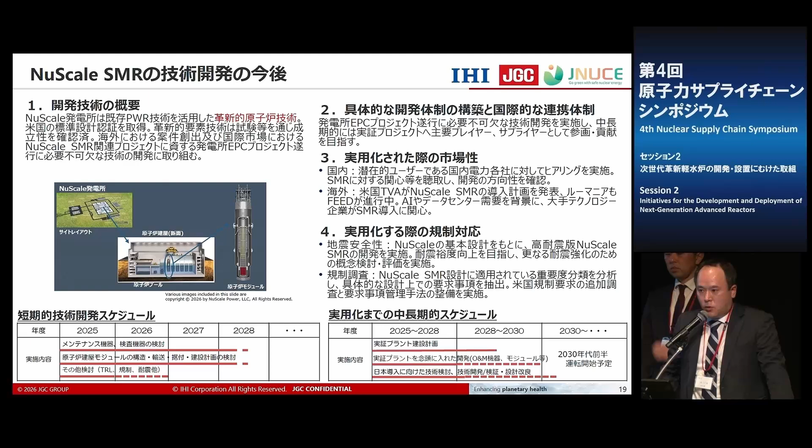Thank you very much. SMR projects overseas were described in detail.

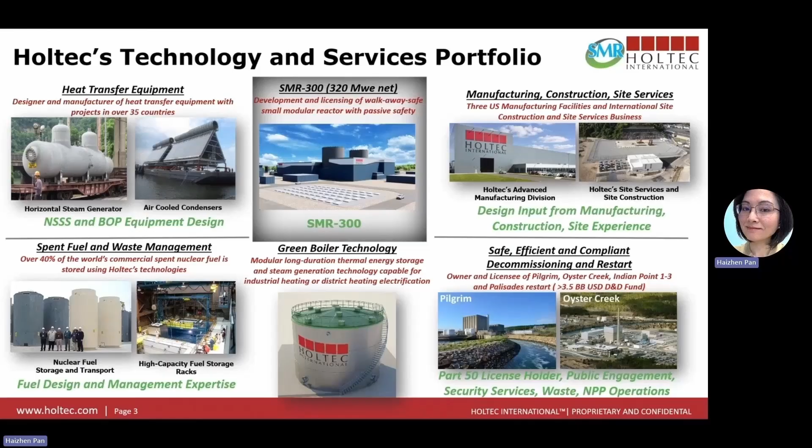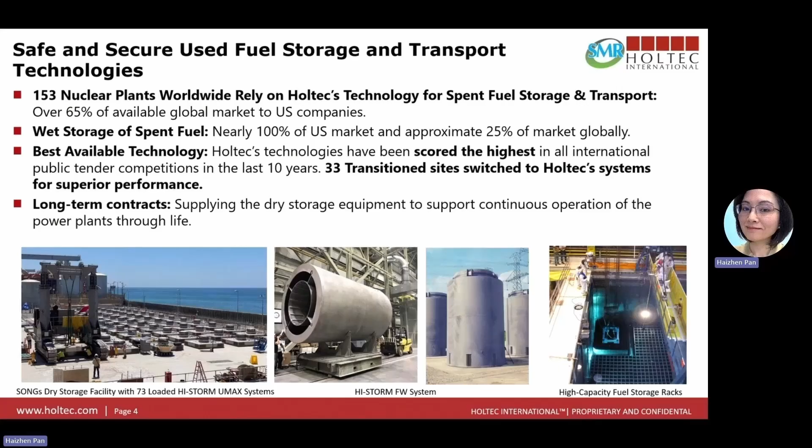We are the world's leader in providing spent nuclear fuel and radioactive waste management solutions. We have over 70% domestic and 60% international market share due to our technology excellence. As you can see, we have over 2,300 dry storage systems loaded at 153 nuclear sites.

We are also the largest commercial nuclear power plant decommissioning company in the US. We hold the licensing for 5 decommissioning sites and are currently performing fleet decommissioning work at all these sites. We established and implemented advanced decommissioning technologies with improved safety and efficiency, which is essential to the implementation of nuclear as clean energy.

We acquired Palisades in 2022 for decommissioning. With support from the state and federal government, Holtec is executing the first ever restart of a shuttered U.S. nuclear power plant, marking a historic milestone for the industry.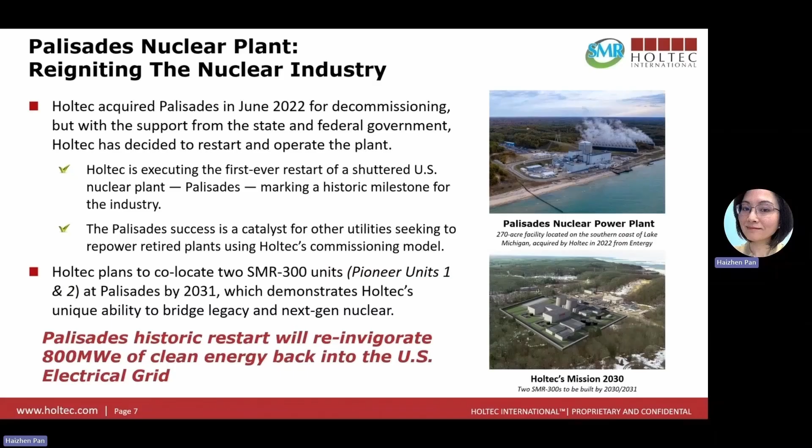Holtec plans to also co-locate a dual unit SMR plant by 2031, which demonstrates Holtec's unique ability to bridge legacy and next-gen nuclear. Here are the key attributes of our SMR300 technology.

Simplified PWR reactor with a proven technology platform, dramatically reducing the number of systems and equipment. Use of off-the-shelf proven technology significantly reduces regulatory risk and provides commercial certainty. Small in size, compact reactor core with high output. Modular structures maximize automation and off-site fabrication, and support efficient construction.

Passive safety, walk-away safe with no immediate action required. 40% of staff required compared with traditional operating plants.

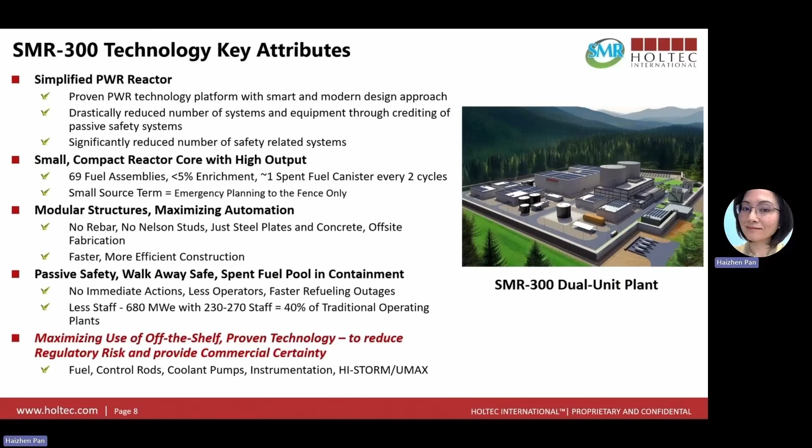Our SMR300 also stands out when compared to other light water reactor SMRs on economics by scale, size, and area comparison. It is further differentiated by an air-cooled condenser cooling option and UMAX spent fuel storage facility as a turnkey fuel management solution through the life of the plant.

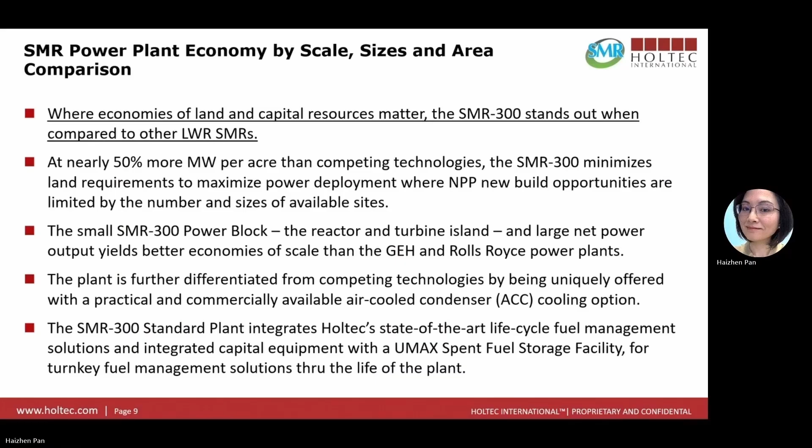As stated above, Holtec will build, own, and operate the FOAK dual unit SMR300 plants at its Palisades site, with a capacity of 680 megawatts and a commercial operation date of 2031 and 2032.

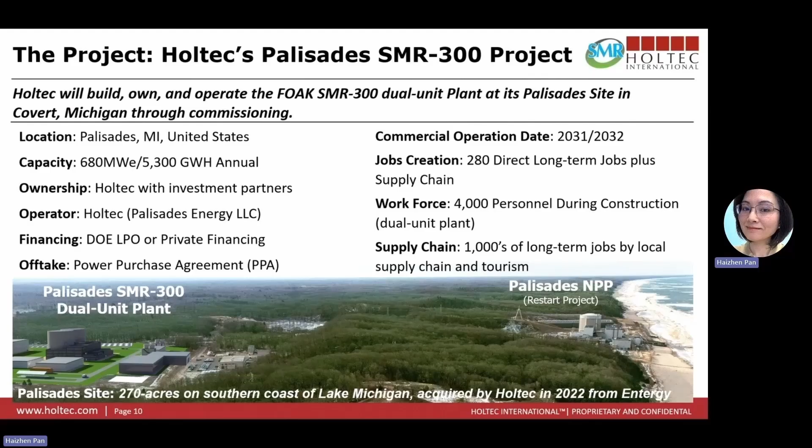The licensing path for Palisades SMR300: our completed key milestone was submitting the Construction Permit Application Part 1 in 2025. We are currently working with the NRC to target a 12-month review, which keeps us on track to begin construction activity in 2027. Subsequently, CPA Part 2 and Operating License Application submittals follow through 2027 and 2030.

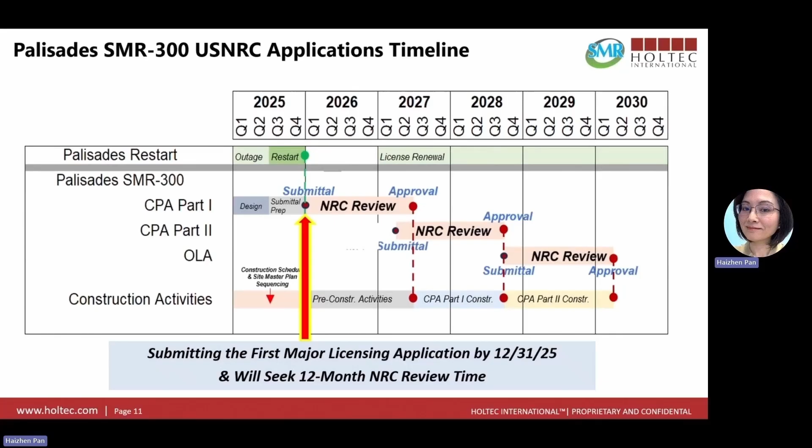This is our overall delivery structure. At the top is the project SPV. Palisades Energy LLC serves as the operator, and Holtec and Hyundai jointly lead the EPC. This one-stop shop model can be applied to any nth-kind SMR300 project worldwide.

As we look ahead, Holtec is committed to building a global high-quality supply chain for the SMR300. Japan remains our most important partner. In particular, Mitsubishi Electric plays a critical role in our program, providing world-class instrumentation and control systems that are essential to the safe and reliable operation of our reactors. We believe Japan's capability will play an essential role in its global deployment. We look forward to working together to shape the future of clean energy. Thank you, have a good day.

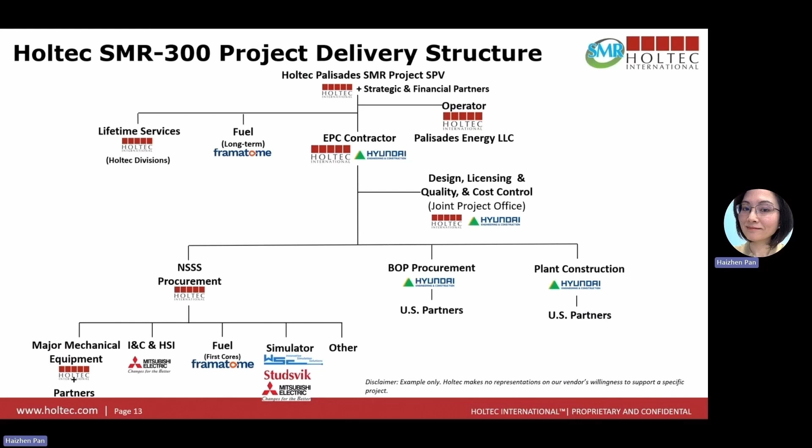Thank you for the kind introduction. I'm Hamamoto from Energy Systems Business at Mitsubishi Electric. I'd like to talk about the nuclear power business of our company and our collaboration with Holtec on SMR300.

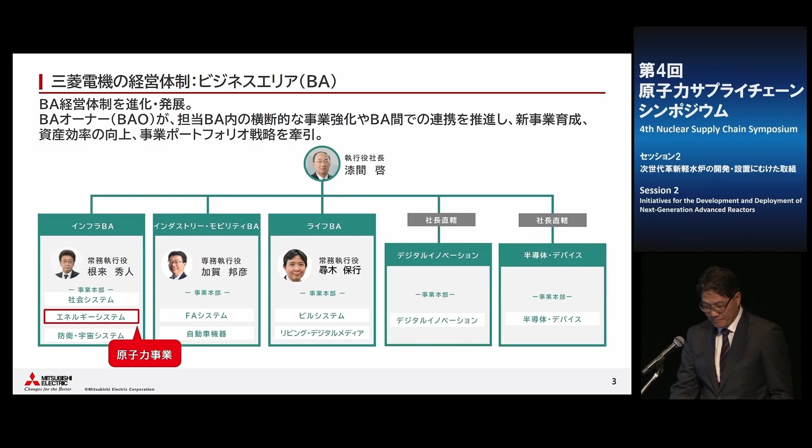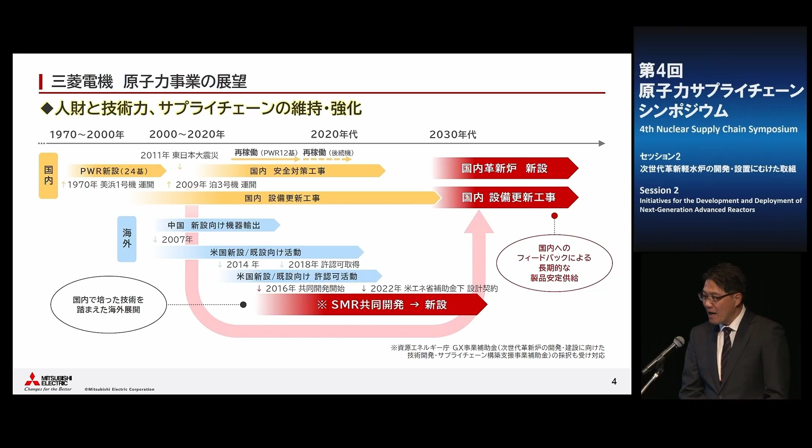First, a brief introduction of the company and the history of our nuclear power business. Our management structure consists of 3 business areas: infrastructure, industry mobility, and life. Nuclear power business belongs to the Energy Systems Business Division within the infrastructure business area. Starting with the domestic production of nuclear power generation technology, we have since expanded our business both in Japan and overseas. With a view to continuously maintaining, retaining, and strengthening our human resources, technical capabilities, and supply chain into the future, we are currently steadily responding to facility renewal work in Japan and working on the joint development of SMRs, as has been explained.

Next, I would like to talk about our initiatives towards SMR 300 realization. We have been involved in Holtec's development projects since 2016 and have been responsible for the development of instrumentation and control devices for 10 years. SMR 300 will be introduced in the U.S. and then expanded globally, with development being promoted in collaboration with multiple companies. With 2 key priorities—complying with global regulations and standards, and collaborating with leading companies in each field—we are working to obtain licenses and permits, strengthen OT security, and build a supply chain. You can see the details starting with the next slides.

First, we introduced MELTAC, a safety instrumented system control platform for nuclear power plants. It features separate and independent design and high seismic resistance, which are particularly critical in nuclear power, providing a digital platform that operates reliably even during emergencies. We have strengthened compliance with global regulation, including EMC, to apply MELTAC to the SMR 300. As a result of these technical efforts, we have obtained approval from the U.S. Nuclear Regulatory Commission for its application in safety systems.

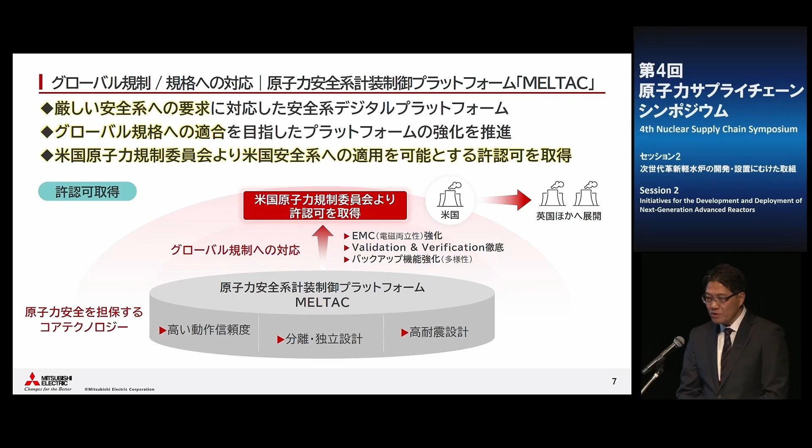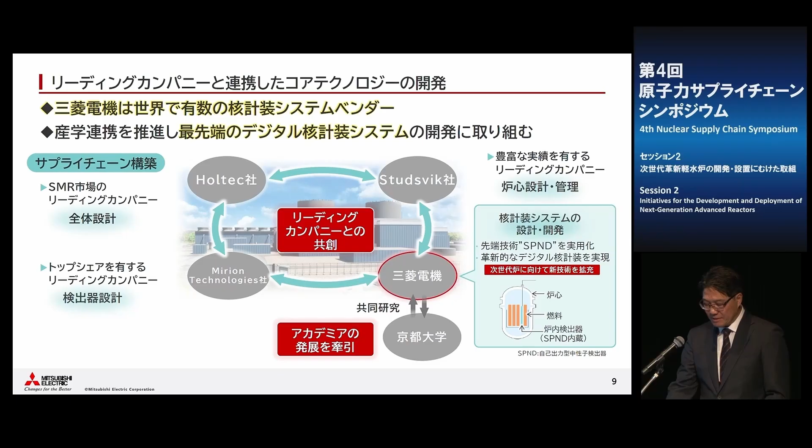Finally, to address robust electricity demand while advancing towards a decarbonized society, we are committed to further contributing to the safety and stable power supply of nuclear power generation through initiatives such as those introduced. Thank you for your attention.